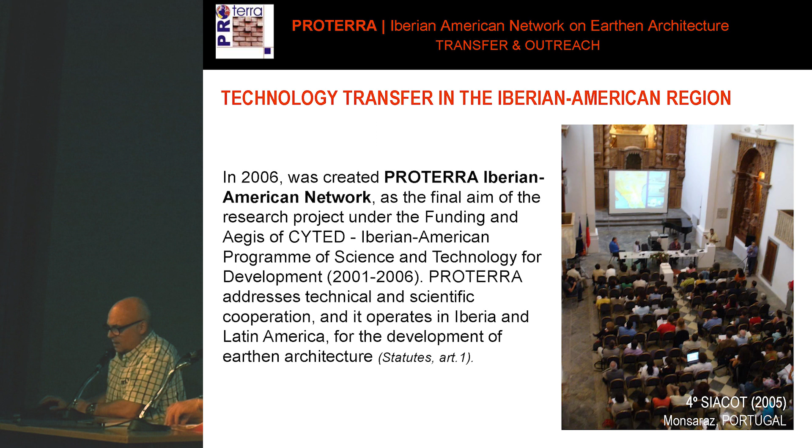The network began in 2006 and grew from the organization CYTED, an important Ibero-American program of science and technology for development that had a network named HABITERRA. That network disappeared, and Proterra, in a certain way, continues the work of that group of people interested in working with Earth.

The mission of Proterra concerns human settlements and habitat in rural and urban areas, and cultural diversity with tangible and intangible knowledge preservation. It contributes to the promotion of sustainable development according to an integrative approach.

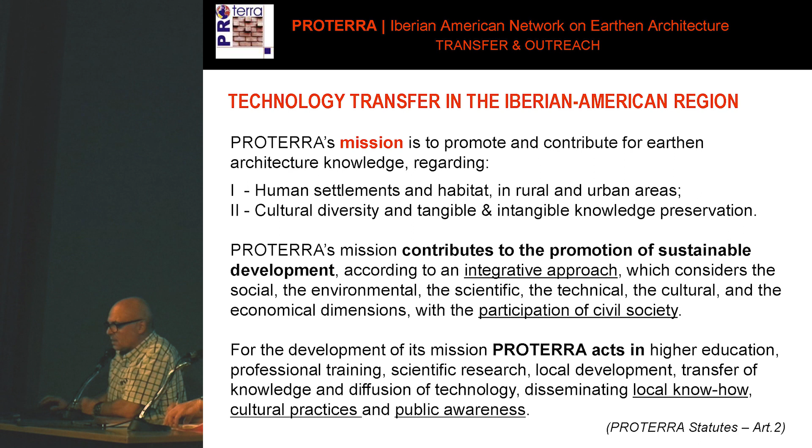It works with participation of civil society in all its forms—universities, governments, NGOs, and people working in this area. It has specific aims like scientific and technical development targeting improved quality of life and sustainable development, and contributing to the integration of the Ibero-American scientific and technological community through exchange and cooperation among its members, and by promoting an agenda of priorities for earthen architecture in the region.

It strengthens Ibero-American capacity for scientific and technological development through the transfer of knowledge and exchange of data of common interest within the framework of earthen architecture.

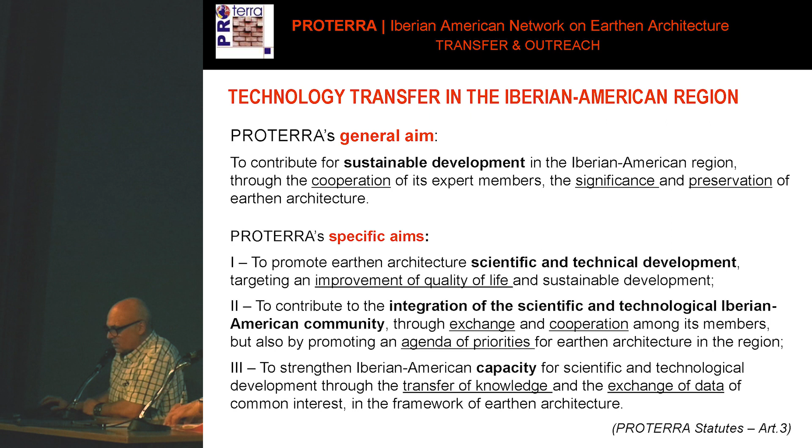In 2017, we also held many workshops with students and people who want to learn this sort of technology, with the aim of making a transfer of technology.

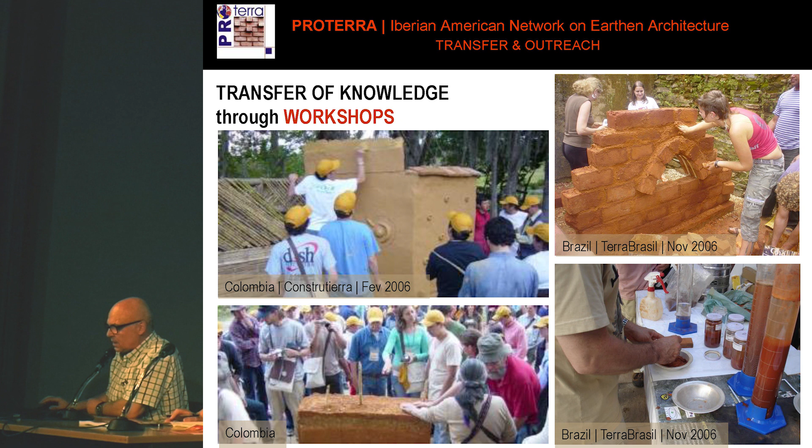In each SIACOT seminar, we present an exposition of the research work done, a sort of presentation of works made with earth from an architectural point of view.

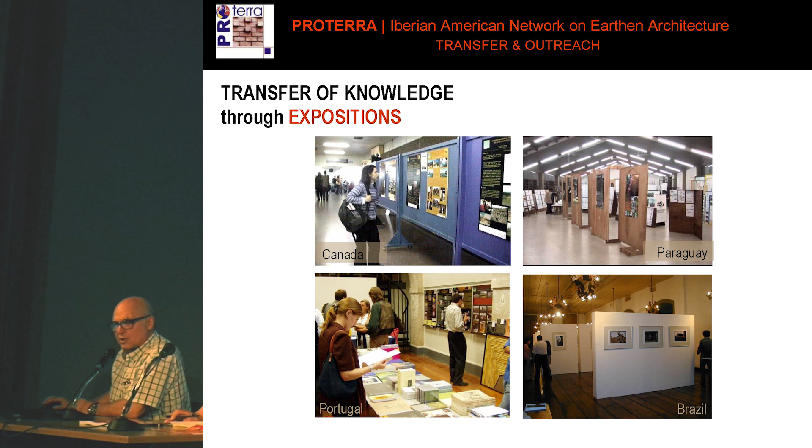Manuals are also very important for running the workshops. Here is an example that gives guidelines for organizing them methodologically.

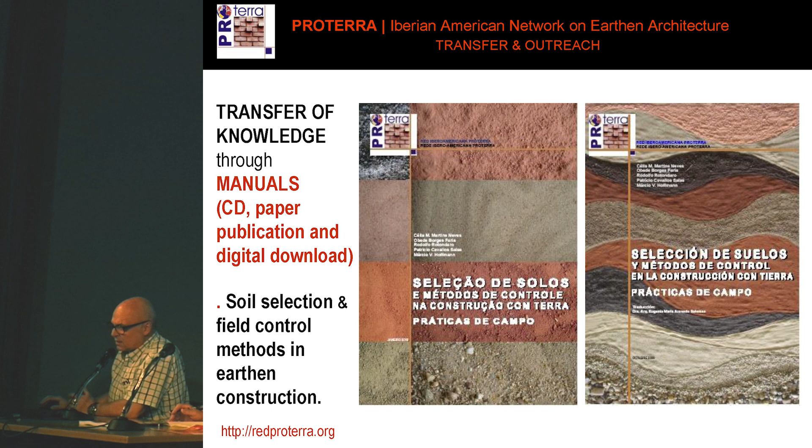Some manuals are more specific, like this one on soil selection, made by important laboratories that are members of the network.

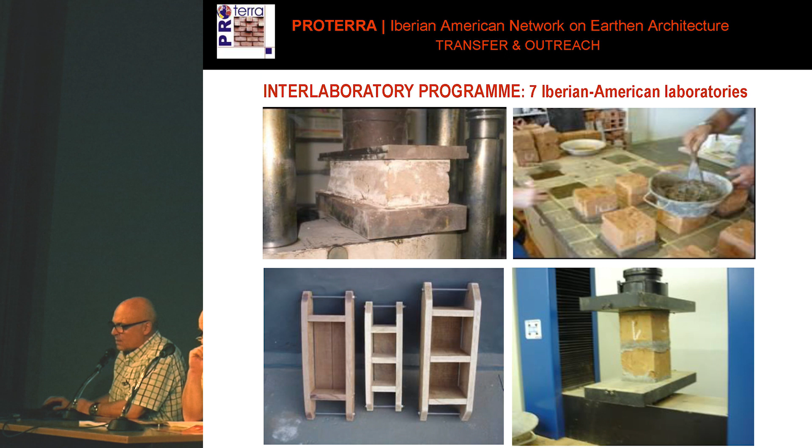Here is an important point: today there were some presentations about laboratories. There is an interchange between different laboratories to draw conclusions about the different tests done on the Earth, and we have to standardize that type of testing.

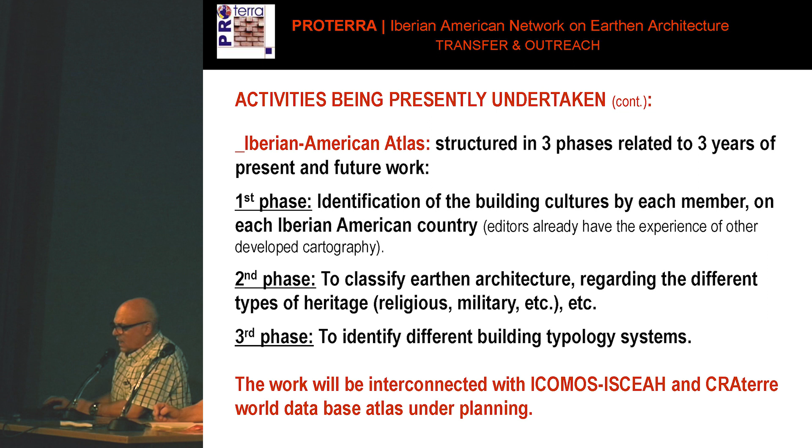The work will be interconnected with ICOMOS-ISCEAH and the CRAterre World Database Atlas, currently under planning. ISCEAH is the International Scientific Committee on Earthen Architecture Heritage, a committee member of ICOMOS that deals exclusively with earthen heritage.

Transfer of knowledge targets different publics. Regional exposition seminars serve as tools for the general public and regional stakeholders. National seminars target municipalities and national institutions. Workshops reach the general public. Credit courses target specialized professionals and researchers. Reference books serve the general public, while technical scientific books serve researchers, professionals, and postgraduate students—PhD and master's degree candidates. Research projects involve research centers and universities, training students and stakeholders.

In conclusion, the exchange of earthen architecture knowledge is now more dynamic and less centralized. Thus, it is important for networks, associations, committees, and institutions to establish an integrative approach in order to avoid repetition of tasks, but also to clarify their mission and objectives and the way to achieve them.

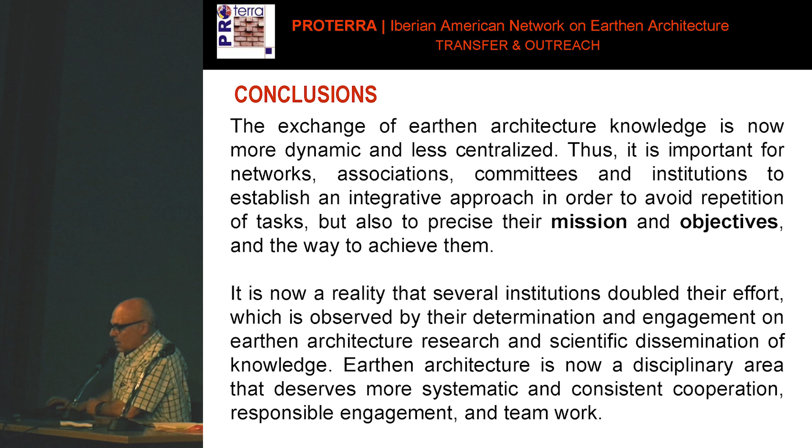It is now a reality that several institutions have doubled their efforts, observed through their determination and engagement in earthen architecture research and scientific dissemination of knowledge. Earthen architecture is now a disciplinary area that deserves more systematic and consistent cooperation, responsible engagement, and teamwork.

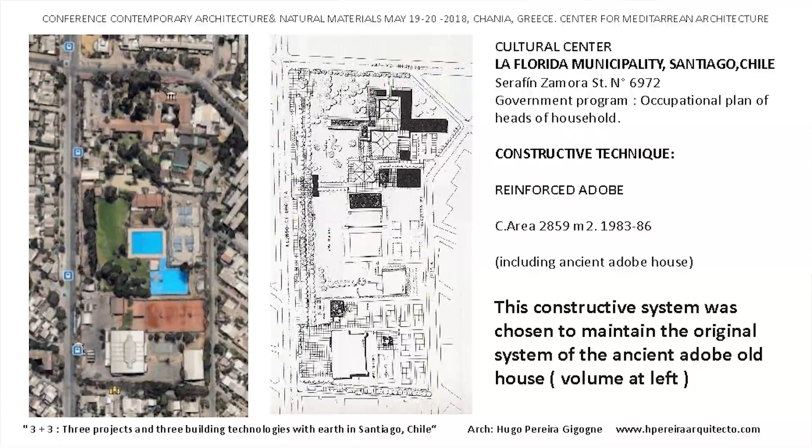So the objective of this program was to give handwork and salaries to the people so they could maintain their families. This cultural center's program is based on an ancient house with black walls - a colonial house from the 19th century that was in this territory, which was rural and then became urban and was urbanized. The project is a sort of patio configured with an auditorium.

It has a library, an auditorium, an area for workshops - that was the ancient house - an area for a museum in this big room, exhibitions also in the same place, and administration at the entrance, and a dining area.

Here is a big park - that's why we don't have photographs of this, because it's full of trees that hide the house. It's a colonial house with ceramic tile roofs, with an important visual presence. So the condition of this project was to continue with this colonial style.

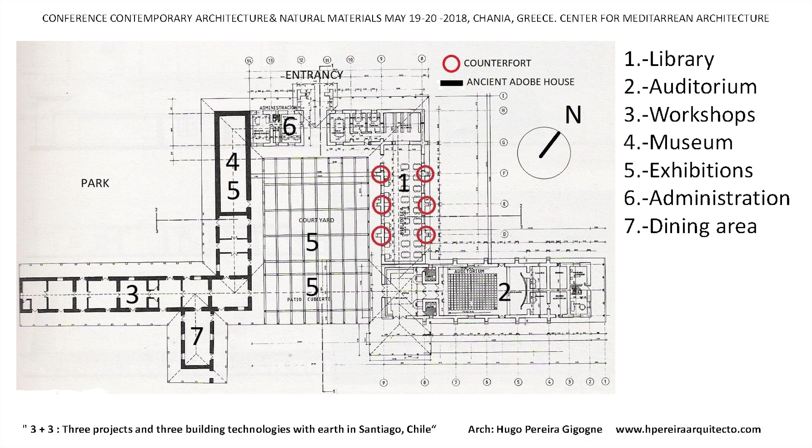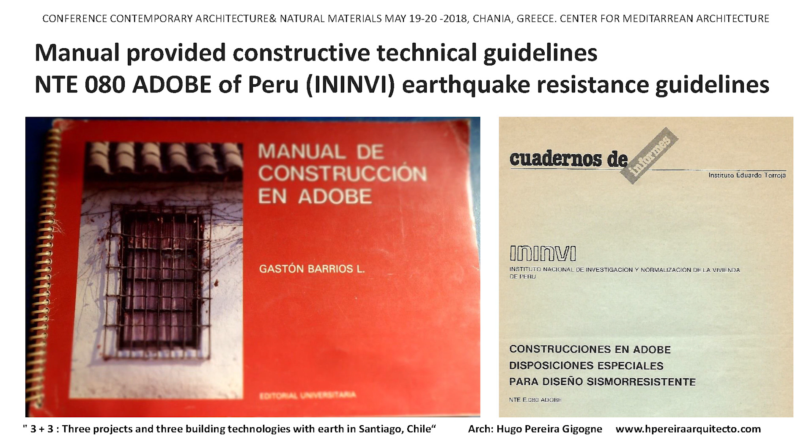We had two documents used for this construction: the Manual de Construcción en Adobe by Professor Gaston Barrios, a very important person who did research at the Catholic University of Chile, and the Code of Peru, the seismic code NTE 080. This code has been changed many times, but it was used by the engineers there in Chile to give, let's say, the resistance form to this house.

Here is the direction, here is the chief of the area, the alcalde - how do you say alcalde in English? It's the mayor, the chief of the program. Yes, the chief of this project, and the architects - one architect who was chief of the work, and three architects who worked with the people.

We have 500 people here. We made a deal with the Catholic University that we would provide them with handwork to make a cement table for testing, with model rooms of adobe - you incline that table and obtain the coefficients and analysis of structural behavior. This group of professionals from the program also collaborated and are named here.

One of the curious things about this program is that 80% of the money the government invested in it was for handwork - only 20% was for buying materials, which is the inverse of any normal construction, where materials are more expensive than handwork. So the purpose was to give people the chance to work.

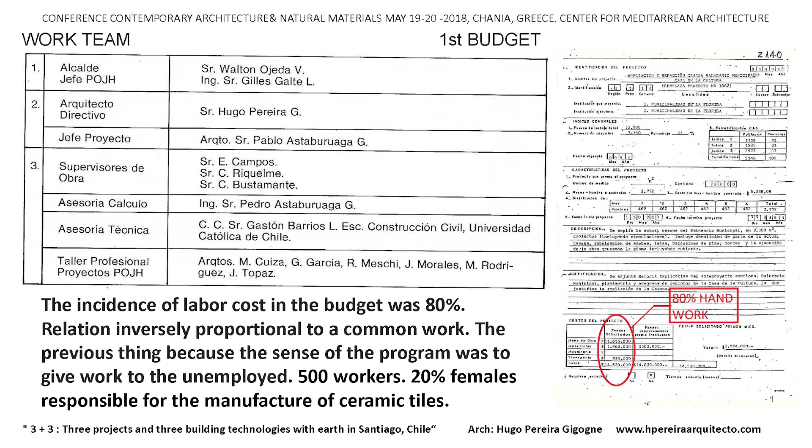Of the 500 workers, 20% were females, responsible for the manufacture of ceramic tiles that were also made on site.

The system of reinforcement was basically this form of trapping the adobes. Adobes were 10, 30, 40 centimeters - the three-quarter adobes that are on the corner - but the full adobe was 10 by 30 by 60 centimeters.

Here are the sort of little walls that are very important for the movement of an earthquake, located here, at these points, in the red circles. So you have a very long wall of adobe, and every 5 meters a transversal little wall that acts as a counterfort, conserving stability against the effort of seismic movement.

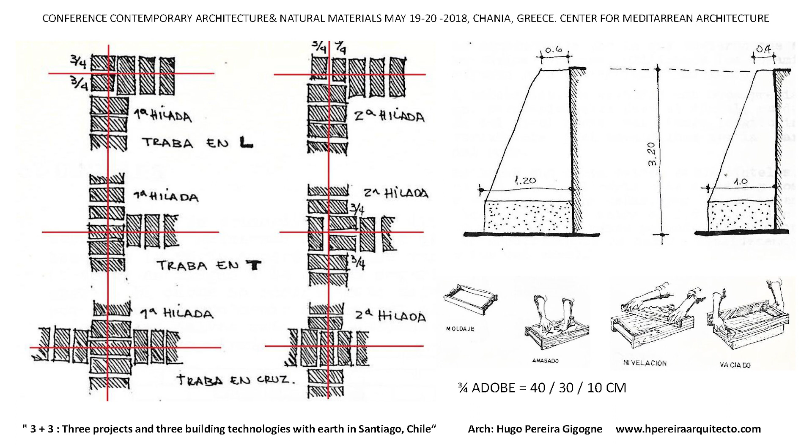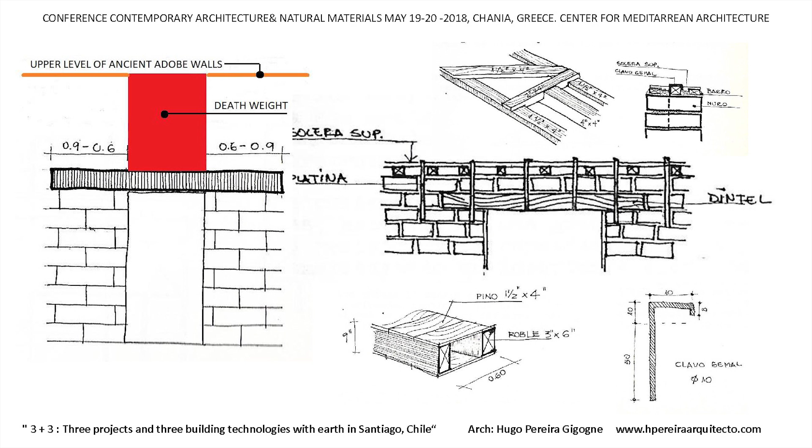There is the sign of the lintels made of wood, a very important screw that connected the superior wood chain with the adobes, and was put inside the wall. There was a triangulation in all the superior reinforcement to ensure good behavior with the seismic activity.

The wooden structure of the roof was made of two pieces, prefabricated in the field, and then were connected by this piece of wood.

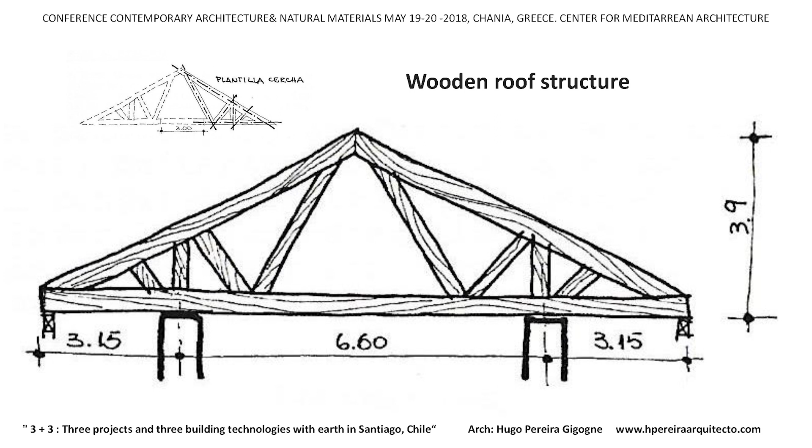Here are the photographs of the fabrication of adobes. The university offered the laboratories to make the tests of resistance, and we recycled a lot of ancient adobe houses that were destroyed. We took that earth, recycled it, and obtained between 10 or 20% more resistance to the compression effort of these pieces. So the work with the university was very important.

They also put students of the university to supervise the installation of adobes and all of that.

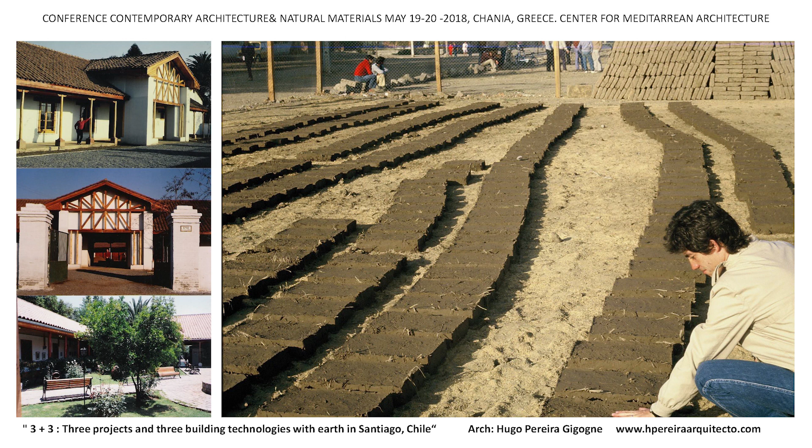Here is the entrance port, a corridor to protect the adobe walls from the rain falling and to conserve it. Here is a view of the interior patio. Here is a view of the library interior, and the courtyard - this is a more recent photograph.

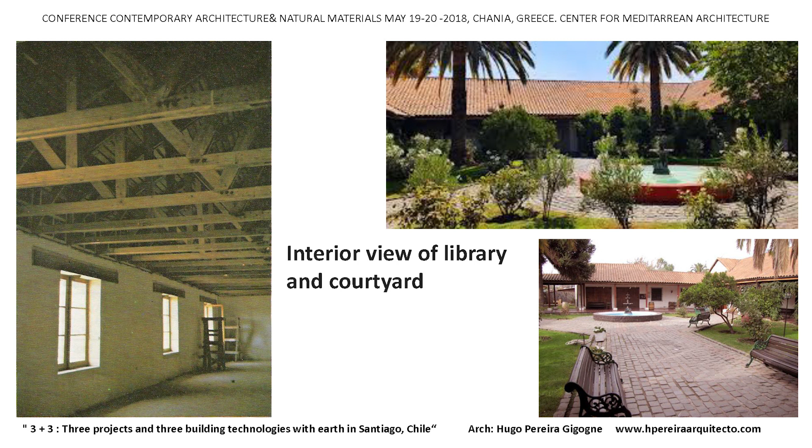This is in the phase of the last constructions. We have paintings there at this moment. That was the first project of adobe, and it's clearly that it...

...could be the most important adobe construction in America. Julian Salas, an engineer that went to all the countries of South America, told us that he hasn't seen a building of that dimension made of adobe in the 80s. And that was published in the review Informes de la Construcción of the Torroja Institute at Madrid in that year.

Later we took on a private project, the community housing in Peñalolén. It's a municipality near the mountains of Santiago.

The choice of the technique of leightened earth, an earth with a lot of straw and little part of earth, was because the vegetable layer was very thin, only 30 centimeters. We couldn't use a massive technique like adobe or rammed earth because we didn't have the earth there to build these houses.

So this is a community of friends, all professionals, middle class, and we all bought this area to construct these 12 houses, which has a principle of prefabrication.

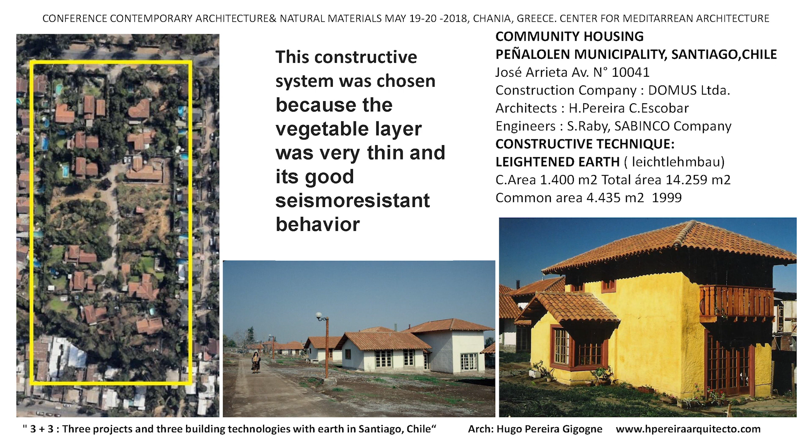We constructed the houses and roofs with the company SABINCO, a Chilean company that works in the area of wooden prefabrication of parts. They constructed the Pavilion of Chile at the Sevilla Exposition, a very important company.

So in 3 days, they prefabricated all the structures of the roof. Here is the distribution of the areas. There is a common area, this one, that's very important. Here is the street to go inside.

We made all the urbanization with our company, including the projects and construction of the houses. The model of the houses is 140 square meters in an area of a median of 500 square meters of private area.

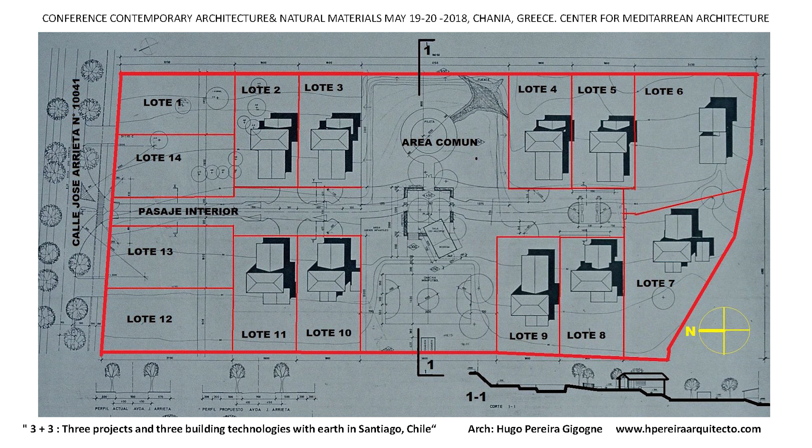In this common area, some sport equipment and some area for agriculture were planned, but it didn't function very much because individuality in Chile is a big problem - it's very difficult for people to work in community systems.

The modules were four bedrooms. The walls were 15 centimeters wide, and there is an entrance at this point. You have a little living room, bathroom, and 2 bedrooms.

Then you go up, because the terrain had a little slope, up to the second floor, where you have the master room. On the first floor you have the living room, dining room, kitchen, and the bedroom service with its bathroom and the interior patio.

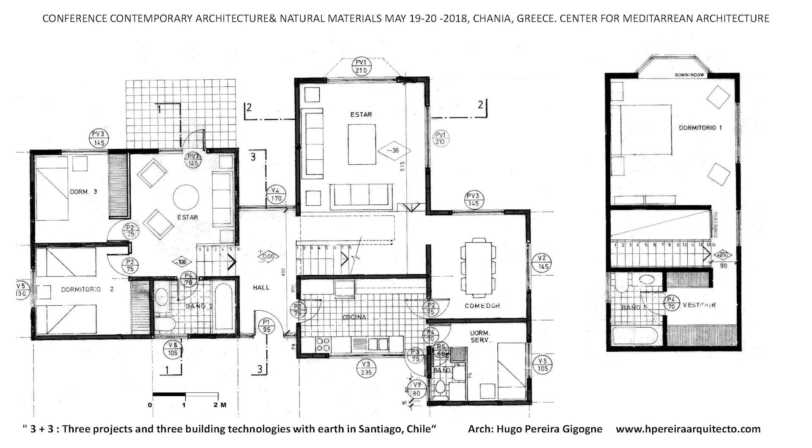The principle of having good windows facing north, in this facade, you can see that we applied passive solar energy as an important thing to obtain a good level of temperature. But it's an area near Santiago that's very cold.

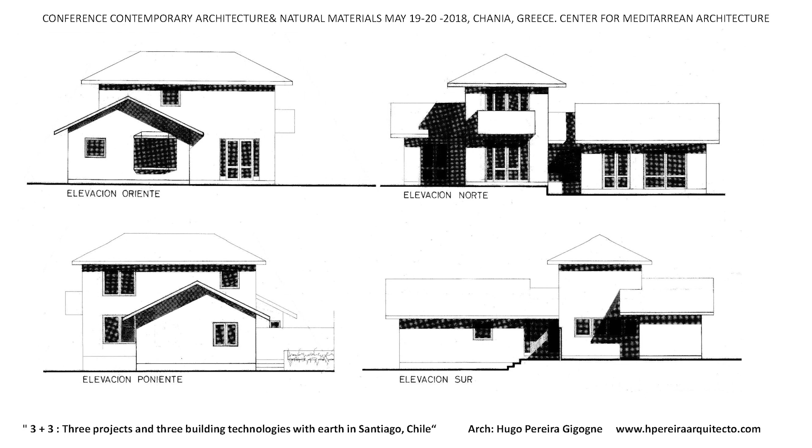It's higher altitude than Santiago, so in the south, where you can have losses of thermal energy, you have little windows, or none, and this has a very good component.

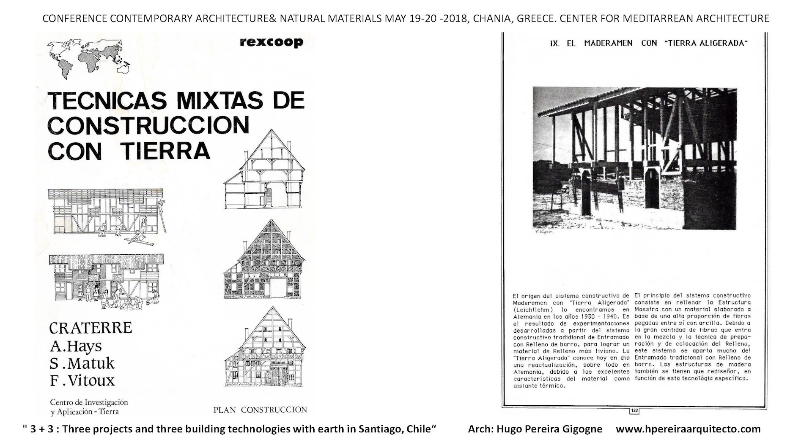The material we used to study this technique was this publication, Construir con Tierra América Latina, which Alain Hays gave me. It's called Técnicas Mixtas de Construcción con Tierra, meaning mixed techniques of wood and earth for construction with earth. That technique was named Leichtlehm in German, developed in the 1930s in Germany, and it's very useful for us to have this information.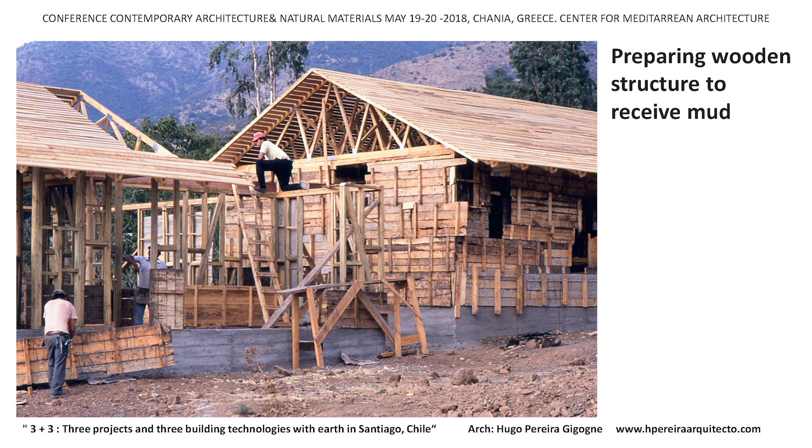Here is the mix with the straw, and there were the workers putting it into the interior of the wall. This is an important detail because in this structure, every 50 centimeters, there is a piece of wood 25 millimeters thick fixed to the interior face, so that when the mud gets dry it can shrink away. This fixes the system for movements and for horizontal forces.

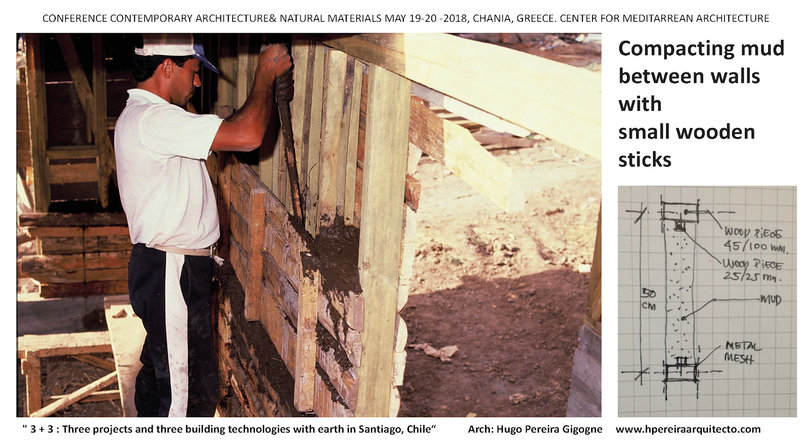Here is an important thing: we used this sort of waste mesh used for the caps of drinking bottles. That was very good, but because it has aluminum, the oxidation was very low. So in the area where you have this, you should put it to obtain continuity of the earth plaster that gives the finish of the wall.

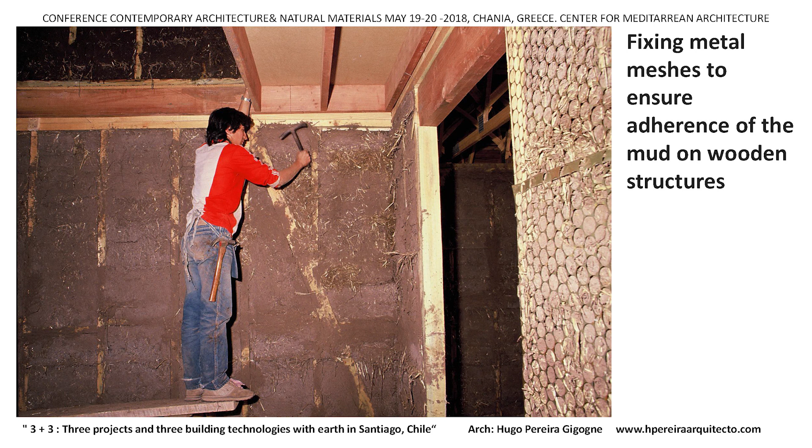Here are the two phases of the project, with the north facade having open windows to gain solar energy, and the interior was very, very good. They passed the first winter without any active heating system. They didn't need it because the behavior of the earth walls was very good.

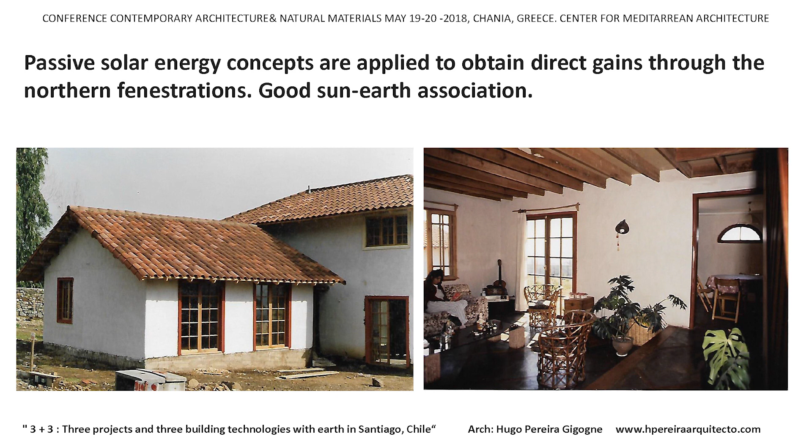Now, the last project I'm going to present is made with reinforced rammed earth construction, at the same municipality of Peñalolén, in a place named Ecological Community. One characteristic of this community is that it has no planning or legal control because it's outside the territory controlled by the municipality. So you can build in earth, in wood, and with different systems.

There are a lot of experiences here. I have constructed two houses here, and another one elsewhere. This special condition allows building with this technique. This is a house where there's a reinforced system; the engineers, including my son Diego, helped me with that. This has a poster, with the before-project, and this one is in the first floor poster exhibition. It was made in the year 2004, and has very good seismic resistance. I will explain why.

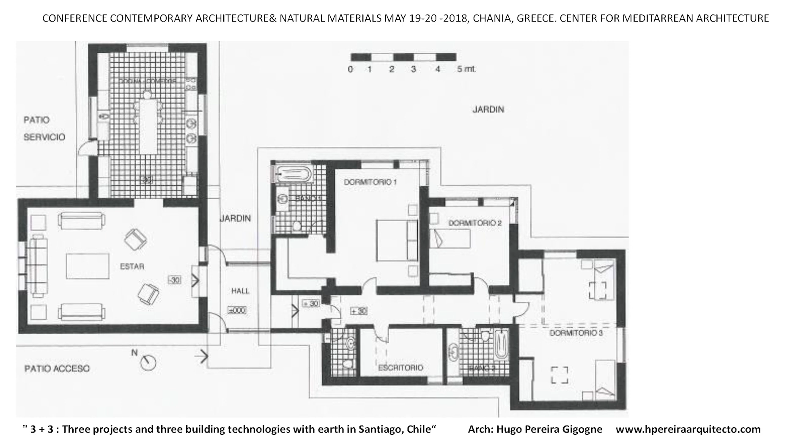Here is the construction technical summary: reinforced walls of 30 and 40 centimeters, and the top is a reinforced concrete chain with iron rebar. I'm very happy Minke isn't here, because he would kill me for this. I'm not so much an 'ayatollah' for earth building, because you have a responsibility to people.

Chile has the biggest—we're not champions of football, but we're champions of earthquakes. One of the three biggest earthquakes in the world was registered on the 27th of February 2010, measuring 8.8 degrees. Imagine that Haiti was devastated by a 7-degree earthquake. The 8.8 in Chile was horrible, because destruction from earthquakes isn't arithmetic, it's a progressive relation—it's not the same increase in degrees; destruction grows much bigger as the degree rises. So it's not a joke to construct with earth in Chile.

So this top reinforced concrete chain is very important for the consolidation of this system.

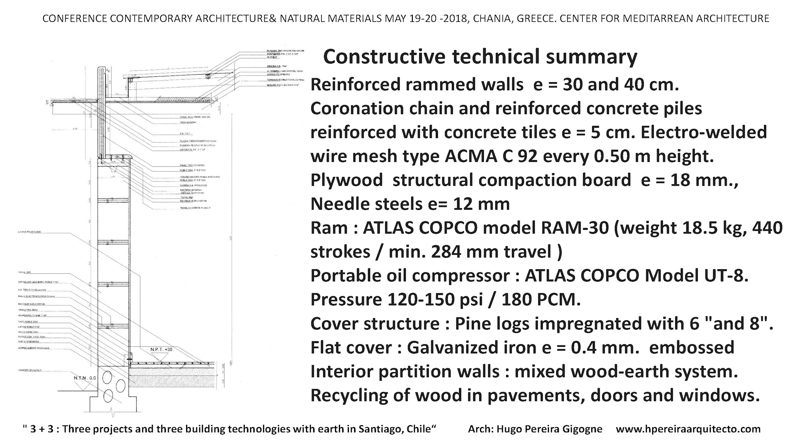Another important condition is to give a minimum of 30 centimeters between the first adobe and the natural soil, because of humidity from capillarity that goes up to the low level of the first area. We put an asphalt protection at this point to cut the humidity that goes to the upper levels of the construction.

One of the texts we studied, because this transfer of technology was made in the context of the CYTED program, at Venezuela, at the University of Merida, they developed this system, tapia modificada, that is ram earth modified, PS5, represented in this design with some reinforcement.

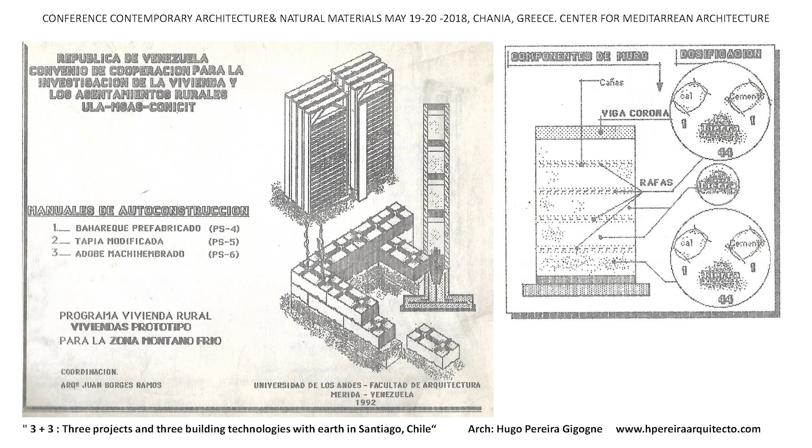These reinforcements were made with cane, and also the superior reinforcement was made with cane, because they're in an area where you can obtain cane, but in Chile we don't have a lot of cane, and it's very, very thin.

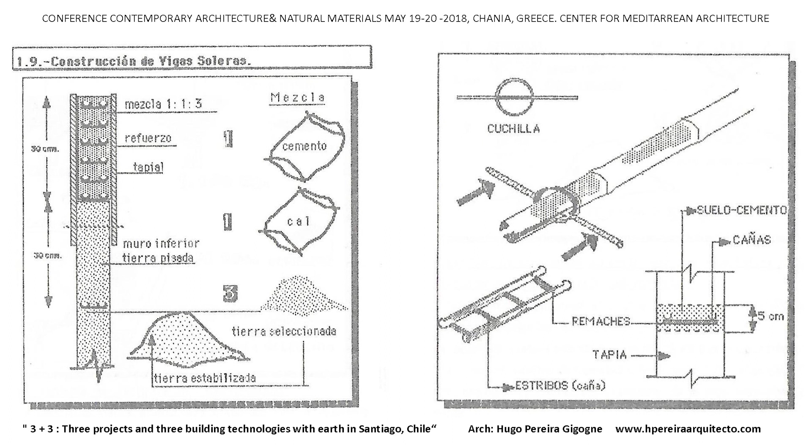This is the system of Venezuela with the reinforcement and the rammed earth, and here is the intermediate reinforcement. Here is the sort of mix of cement, soil, and here is the cut of the cane to make that reinforcement, but we used iron for that instead.

Because the engineers in Chile believed that sort of reinforcement wasn't strong enough to resist our earthquakes, we used these forms to compact the earth.

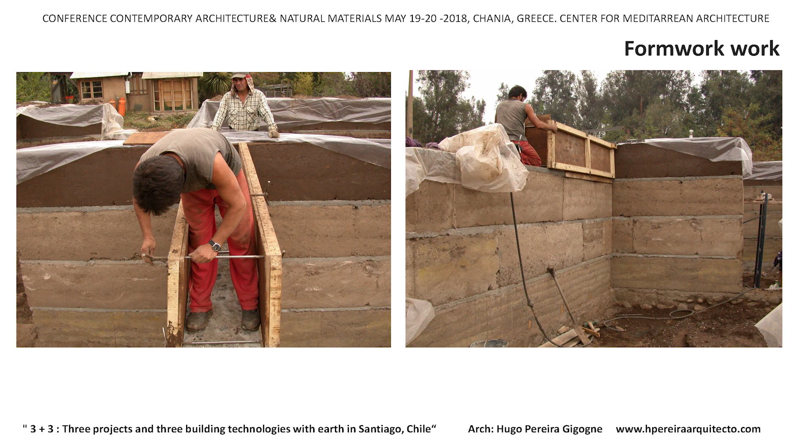We made these special connections with iron to connect the system. Here is the channel in the reinforced concrete that is very important, because if you don't make this little channel — which can be with right angles, this way, or with a triangle — you have to put this connection here, because when you put the concrete and the horizontal force of the earthquake comes, you can ensure that the wall stays connected with the reinforcement.

If you don't put this, the upper chain goes out. We saw this in some constructions in Chile, where architects who didn't know how to construct with earth didn't put this channel. After the earthquake, the wall stayed in one place and the chain in another, with a big destruction.

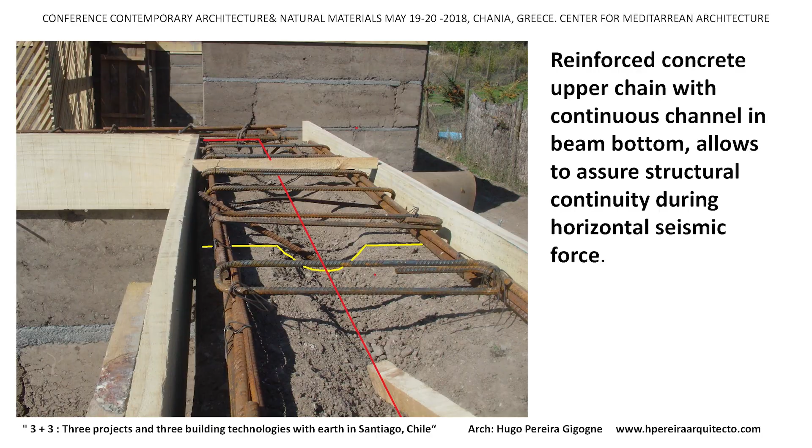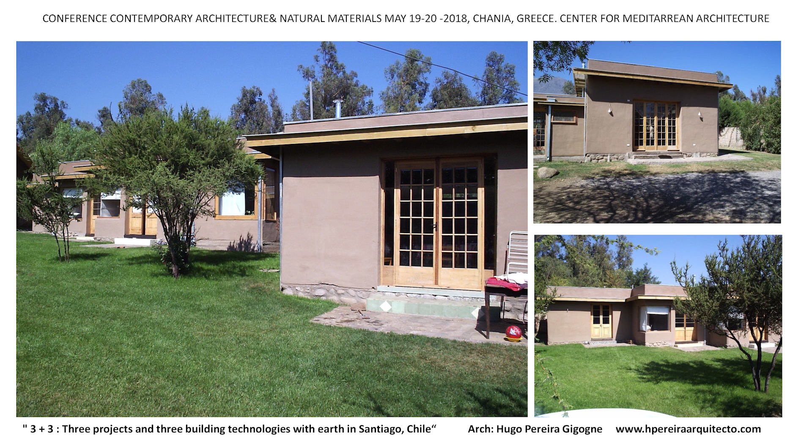This is not a system approved by the Chilean codes, but we are trying, at the ProTierra Chile network, to go to the government, approve these systems, and allow construction with them. Thank you very much.